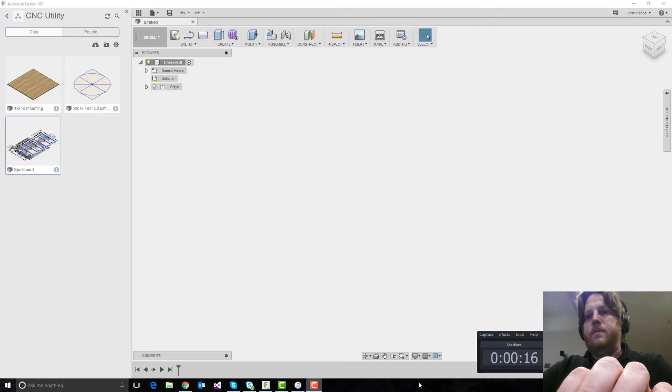All right, so we're going to get started here. Just going to open up a new project, open up a new file. Getting things going, going to start a sketch, and I'm going to blaze through everything that happens until we get to the actual CAM, and then I'll discuss the CAM. Actually, I'll do all the CAM, and I'll discuss it.

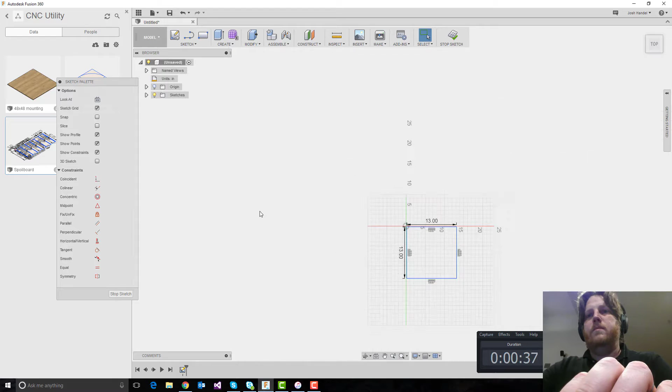And there's lots of randomly going around, and you'll see me going to the websites and reading some values, and in the end, I actually wasn't super comfortable with some of the values I was reading, so while I have this all mocked out, it may change before I actually cut it. So now for super fast forward.

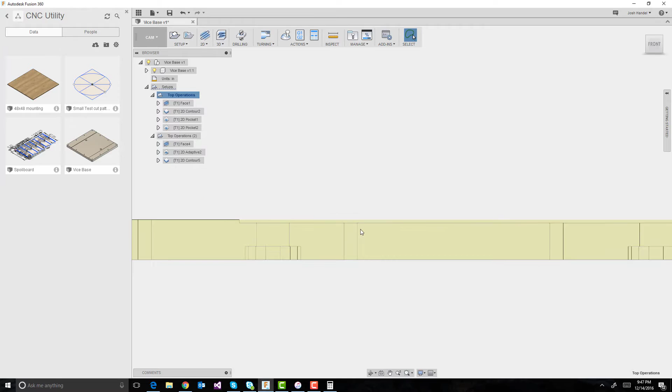There's top and bottom. So the top has got a notch in it. That's what the vise is going to sit in. It should help square it up. Showing the little notch. I think it's a 1/16 of an inch, maybe an 1/8 of an inch. Can't remember what I did. 1/16 of an inch. So it's a 1/16 of an inch notch. And then there's the two spots where the bolts will come through, stick up, and the vise will mount to them.

The grid pattern's there. There's a 4-inch grid pattern with the bolts. There's two that are there, but they're never being used. You won't ever get to them. The vise will be on top of them. And we're just showing how the bolts will come through. They should slip into those two slots. That's the idea, the bolts will slip into the slots.

I could have threaded it, come from the bottom and threaded it down, but I like the idea of bolts coming all the way up. It should be fairly easy to drop the vise on it, the 80-pound vise. Put the vise on it, tighten it down, and with the notches it should be fairly squareable.

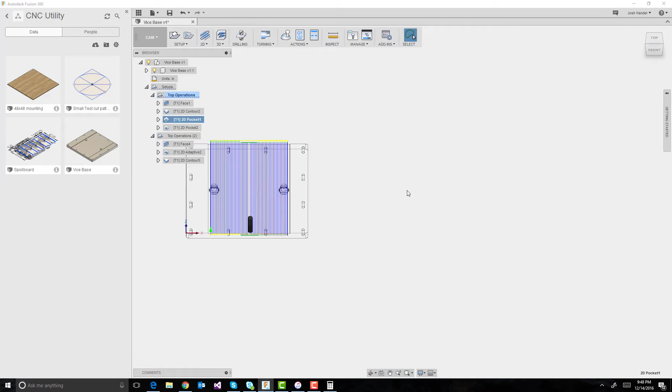So we face it, we do the contouring around the edges, we do the pocketing. I could do the adaptive pocketing and then come back and do the pocketing to finish it, but we'll just do pocketing with the finishing, and it'll all be in one run. Then we pocket out all the holes. No finishing passes on those, and we're just doing straight plunges because they're so small.

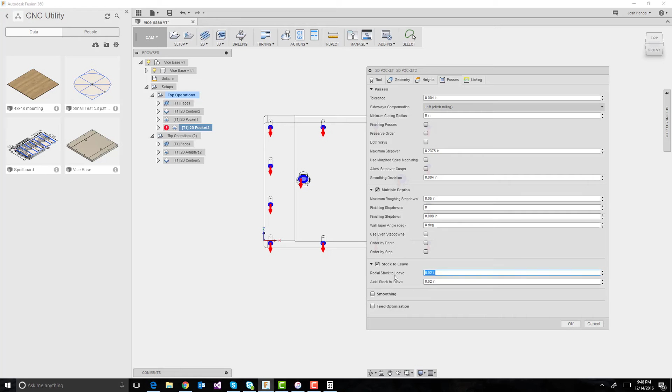1/4-inch bit, essentially it's a drilling action, but I don't have a 1/4-inch drill. Well, I do, but I don't want to go through into my spoil board, so I like my end mill for that. Part of the reason I'm making this is because you really need to be able to go through when you're doing something more than wood.

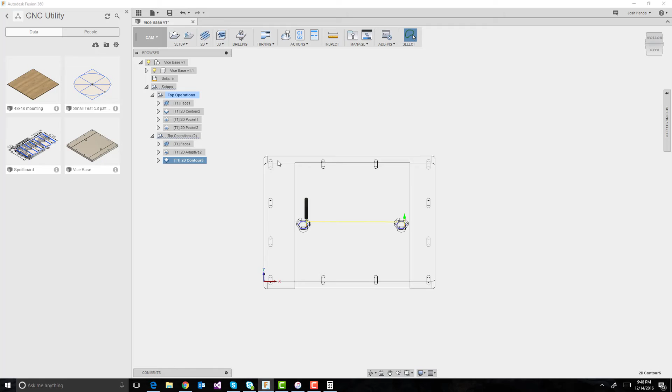On the back side, we have the two back pieces. So we face it, and then we mill out where the bolts go. Assuming I can line it up perfectly, they'll show up exactly where they're supposed to, and it'll be freaking brilliant, man. And I'm just showing how everything goes together when you flip it around. So all in all, pretty straightforward. We will see how it builds. We follow on video for cutting it, making chips and seeing what happens there.

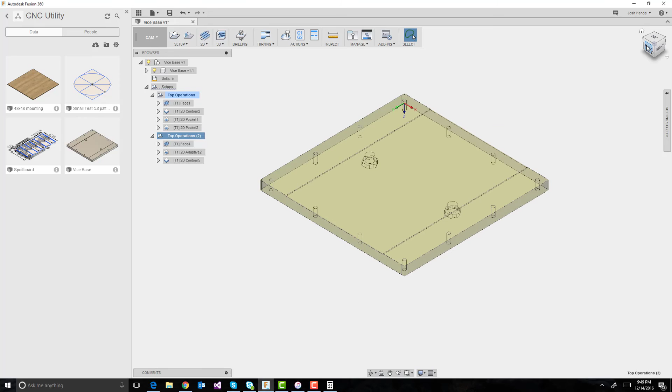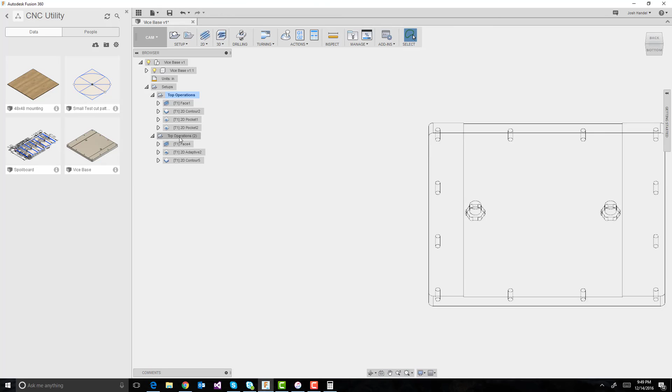And really, this whole diving into making this is fairly interesting. It's a vise for a CNC mill. So I'm a CNC router, CNC mill, kind of the same. Rigidity is nothing alike, but we'll see. So it's all NYC CNC's fault, John. I know I'm a knob, but damn it for making it look so cool. And so we'll see what happens.